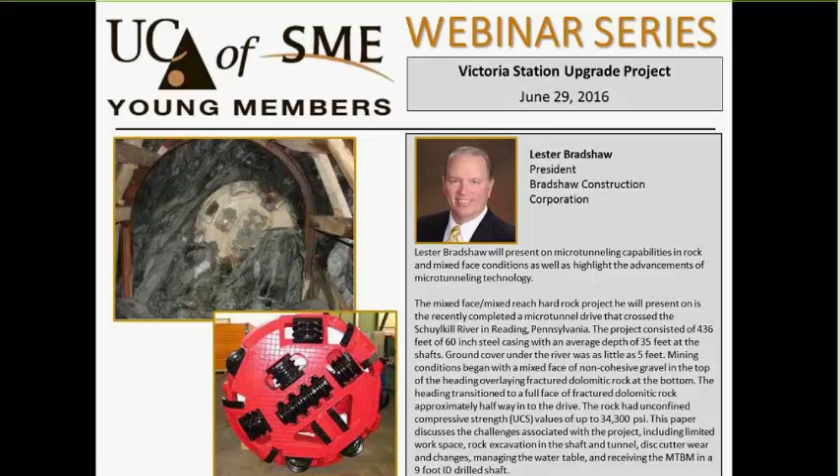I was asked to do this webinar just a few weeks ago, and I wanted to talk about microtunneling in rock. It's something that's not done all that often. For those not familiar, microtunneling is pipe jacking, using remote-controlled equipment much like ROVs searching under the water for things like the Titanic. We control these machines remotely from the surface, and they're very sophisticated with slurry systems for holding face stability and transporting the soils, and very efficient.

Today I want to share facts and things we've learned from a contractor's perspective on microtunneling in rock, whether sedimentary, igneous, or metamorphic. Then I'll go through a case study of an actual job, to get a sense of what it's like to be a contractor.

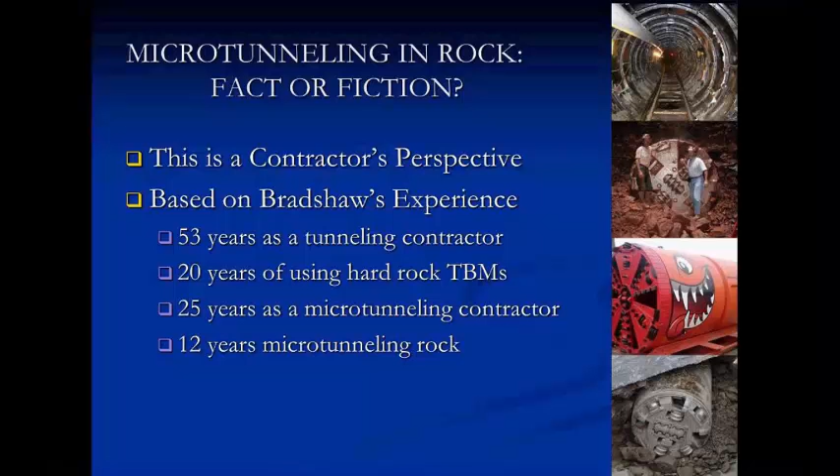Many in the industry, and bluntly among the engineering community even to this date, are unfamiliar with the ability of microtunneling to cut rock. There have been, however, significant developments in that industry over the last 20 years.

When it was first attempted in rock, there was very little success, primarily because many of the original microtunneling firms were not tunneling firms. They hadn't hand mined or used TBMs before and didn't understand the limitations.

There was also one major development in the industry by Herrenknecht, which was face access, the ability to go through the machine and change the cutting tools as they wear out when cutting rock. That was a critical aspect.

When that became available is when Bradshaw decided it was time to try cutting hard rock. We purchased the equipment in 2004 and did 6,000 feet of 60-inch OD concrete polycrete pipe in Baltimore City, in mixed face, mixed reach, and solid rock, which so happened to go all the way up to 43,000 PSI.

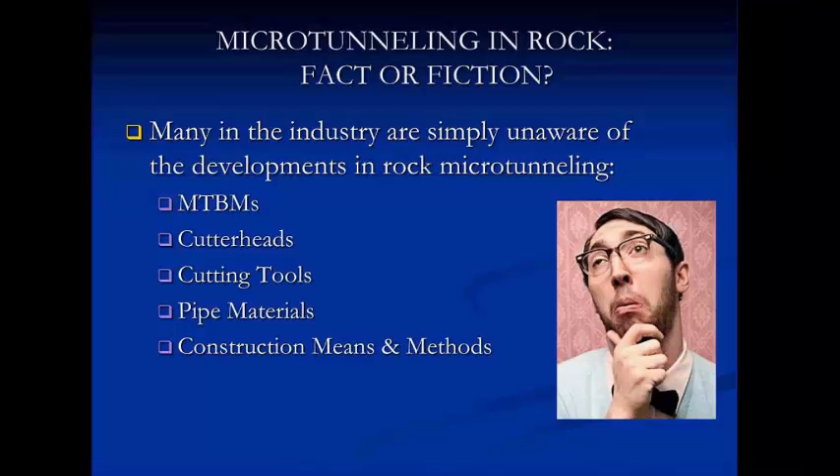Prior to 2004 or so, there had been quite a bit of sedimentary rock microtunneling. It's soft, behaves like dense soil, with a significant amount of it in the Midwest United States. In fact, some production records were set, I believe, pipe jacking through soft shales, clay stones, etc. We've done several of those projects, and it's quite different when you can push 50 to 120 feet of steel casing through the ground in soft rock, as opposed to sometimes in crystalline rock spending 12 hours to cut 8 to 12 feet.

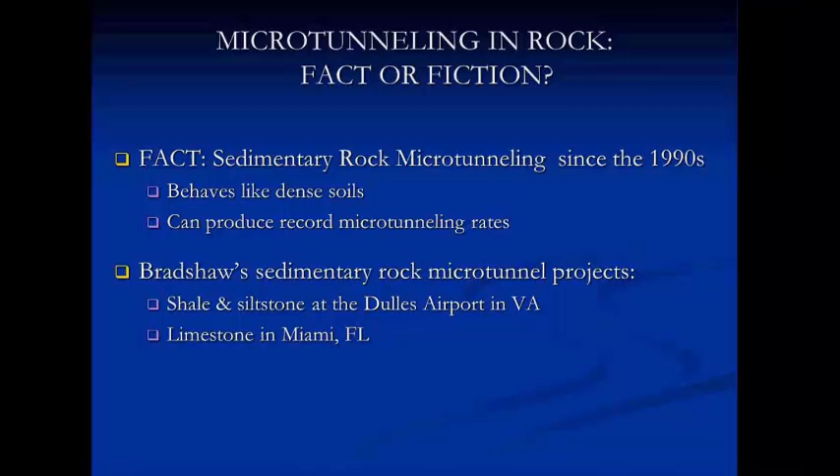What do we mean by hard rock? It's igneous and metamorphic rock formations - crystalline in nature, abrasive, and in the worst case, also massive with very little fracturing. Often people look just at unconfined compressive strength and think that tells you a lot, but highly fractured rock can have very high UCS, 30,000 to 40,000 psi, yet if it's got a lot of fractures, the disc cutter technique of mining is quite effective. As opposed to that, we've seen massive rock as low as 12,000, 15,000, even 10,000 psi UCS be exceptionally difficult to cut through.

Early attempts, as I mentioned, were made in the 90s, and they were extremely limited in success. Most completely failed. We're talking about going 15 to 20 feet and having to extract or backpull the machine to even attempt to try again. The cutters wore too fast, and you couldn't change them except by pulling the machine out or digging a rescue shaft.

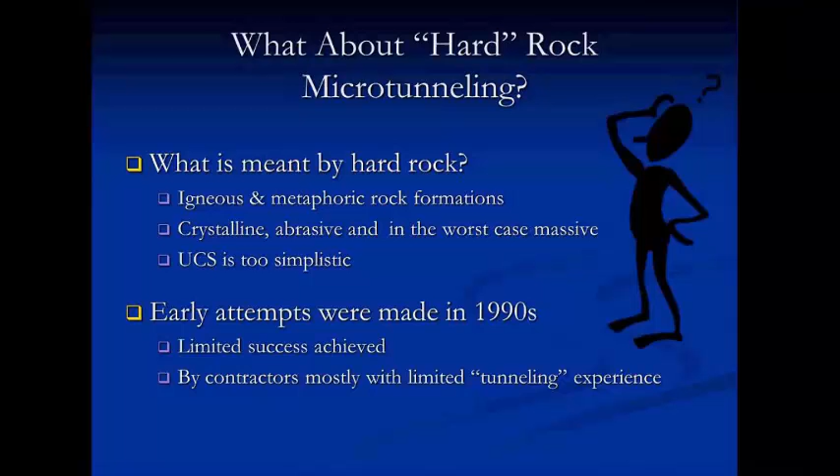As I mentioned, face access was introduced, but only down to 59.25 inch TBMs. The primary reason is that in a 59.25 inch OD TBM, there's only an 18-inch port - looks like a porthole, like a torpedo tube door - right up through the center of the machine to the back, and the cutting chamber itself is relatively small. You truly have to micro through that hole to change the cutters, but we do it.

The new HK T-Series TBMs that came out back then were considerably heavier and had a lot more torque to cut rock with. We studied closely all the early projects we could and compared them to our main beam TBM machines, of which we have used one at 83 inch and a little bit larger.

The other thing to keep in mind is if you get below 59.25 inches, you don't have face access, and therefore the length of a microtunnel is highly dependent on how long the cutting tools will last at the face, particularly the perimeter gauge cutters. You might be able to go 200 feet, maybe even 500 feet in a soft shale, but in a hard crystalline rock, you may not get 25 to 50 feet before you run out of gauge.

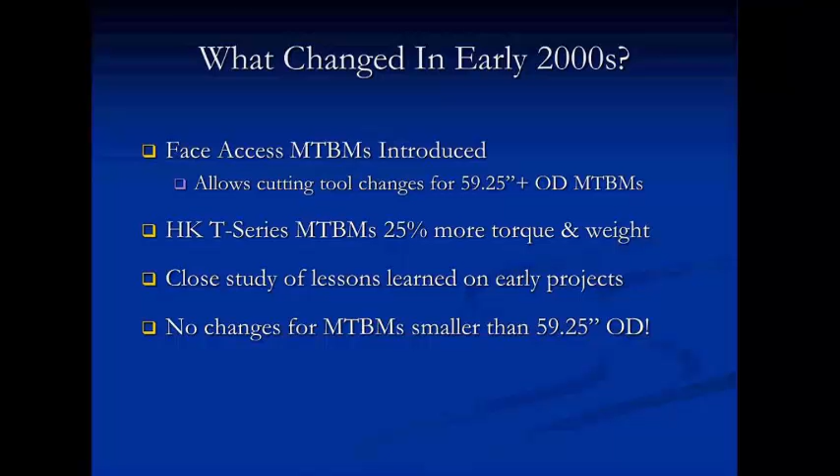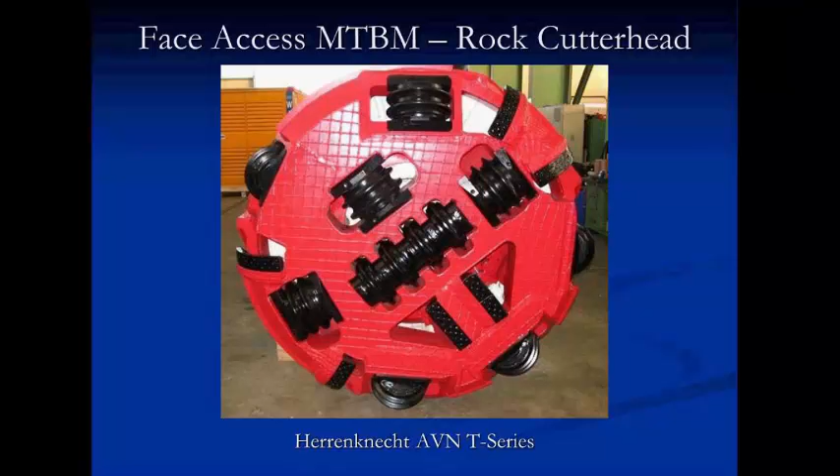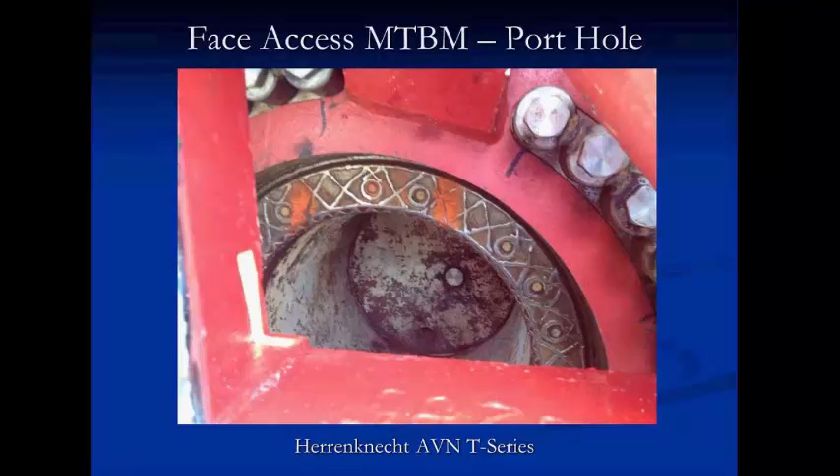These cutters can be loaded from the front of the machine, which makes it easy for servicing when they're above ground. You load them from the back when you're below ground, through the cutting wheel. You can see that porthole in there, and that's what you crawl through to make the cutter change.

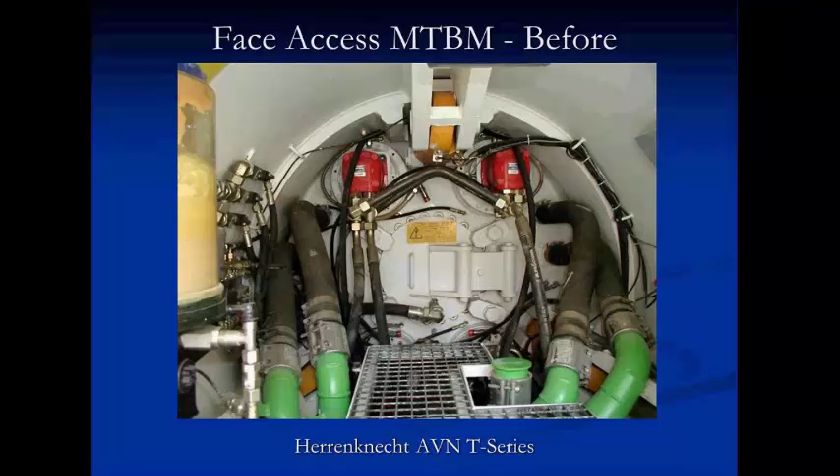From inside the machine, when they're in the shop, they're nice and clean. You can see that door up there, and that door is much like a torpedo tube door. You don't bolt it, you disconnect it from the slurry line, or in this case a bit line, and crawl through. After you've done a drive, or partially through the drive, this is what it looks like after a while of crawling through, because in the back of that cutting wheel are cuttings and slurry sometimes. You have to be able to pump them out and crawl up in there.

In this instance, you're looking at triple kerf cutters. I think this happens to be a mixed ground cutting wheel we were using.

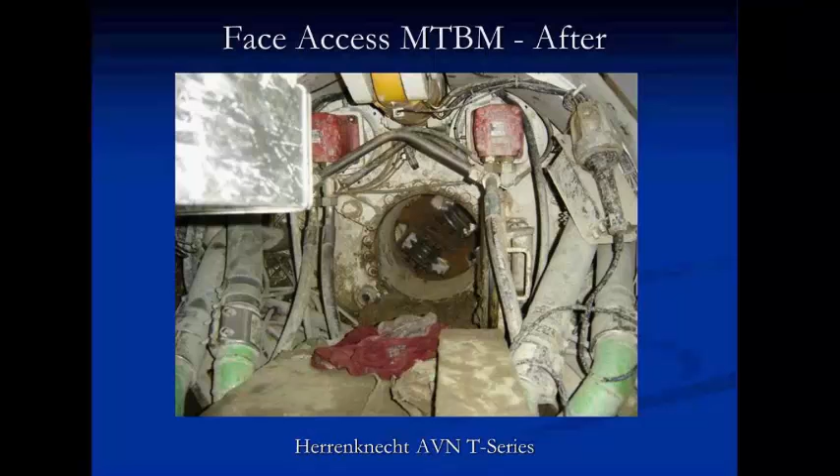Fundamentals of physics when it comes to rock cutting: large, up to 72 inches, the maximum diameter cutter you're going to get is 11 inches. That's the red double kerf cutter on your left in this picture.

We recently purchased a Robbins double shielded machine where you can front load the cutters, and we've got them up to 14 inches in diameter. On your typical TBM, I believe at Robbins they have one that's 88 inches, but typically from 96 inches and above, they will front load 17-inch cutters.

The difference between back load and front load is the front loaders have much more bearing surface on the front of the machine, whereas with the back loaders you have to cut out the actual cutting wheel to fit the disc cutter up in, and try to get optimal spacing, which is about 75 millimeters, between kerfs, and fit enough of them across the face that they don't get in each other's way and allow room for ports for the material, the cuttings, to come through the head. It becomes a very complicated and difficult problem the smaller you get.

The other key to this is look at the thrust capacity. An 11-inch cutter has 17,000 pounds of disc cutter capacity, and that only comes if you create what's called a monoblock cutter. The cutter on the left there is around the outside of a bearing race, whereas the other two are what are called ring and hub. A ring is a cutter that is put onto the hub. That cutting ring is replaceable, whereas the hub and bearings can keep going.

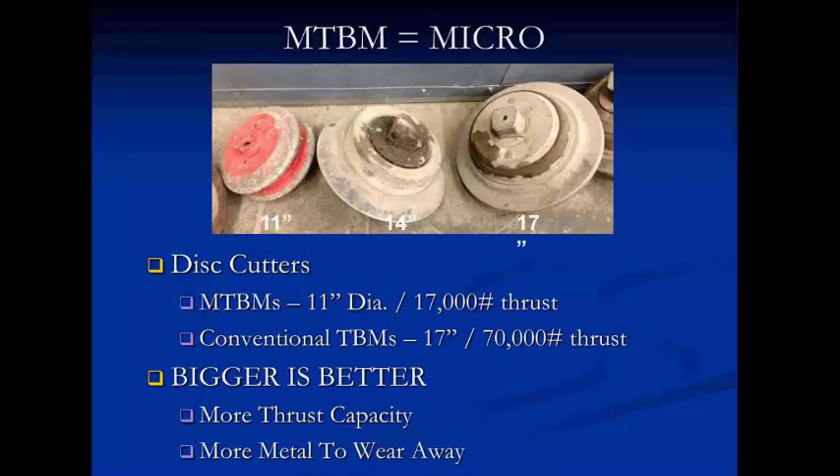Microtunneling, though, why do it? And why not just have an all rock tunnel and use a conventional main beam machine? Well, we do a lot of water and sewer work, particularly shallow gravity sewer work.

What you see there is you don't see solid rock. You see mixed face, mixed reach conditions, highly weathered to competent rock. Main beam tunnel bores, even double shielded, Robbins machines, do not do well in mixed face, mixed reach conditions. We just finished 3,000 feet and multiple drives in Baltimore City.

Every time we hit highly decomposed rock, the machine clogged up and we got terrible production. In those areas, the microtunneling machine would have gone quite well. The reason we used the Robbins was because we could put 14-inch cutters on the front, and the bulk of the job was solid, hard rock up in the 30,000 range.

The smaller the diameter, many of you are engineers, the smaller the diameter, the stronger the rock is, because we have a lower radius on our arch, and you have less flake drop out of the matrix. On jobs where our 60-inch rock machine will go through, there will be no blocky fallouts of the crown.

Same job where we attempted to use our 83-inch main beam Jarva machine, and the blocks just slid right out of the shoulders. The dip on the rock was in the 70 to 80 degree range. It came in, damaged the cutting wheel, and prevented us forward operation. So the smaller can be better.

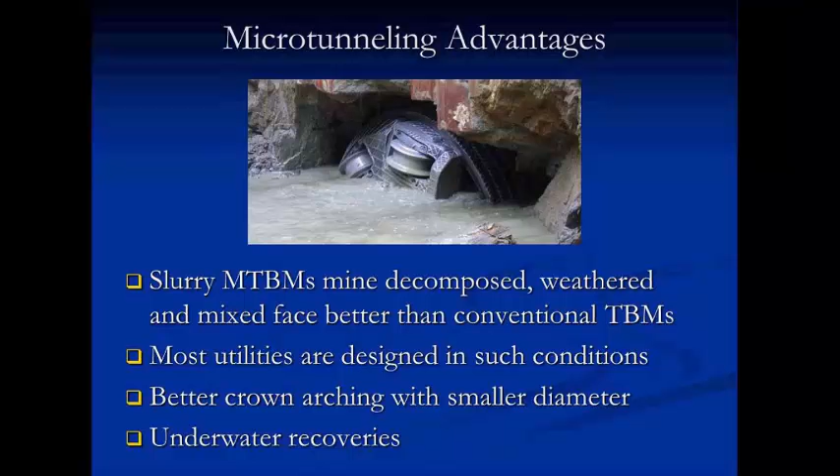The key to rock microtunneling: understand the geology, and then understand the limitations of the equipment, the pipe jacking materials, and then the means and methods themselves.

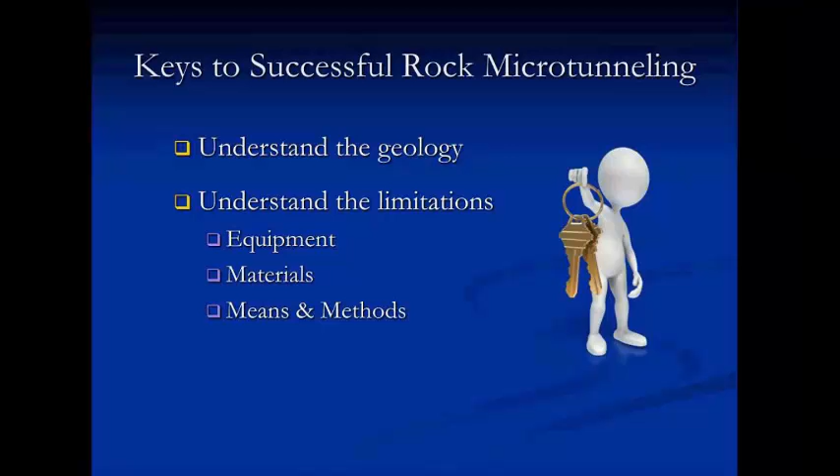We want to know the type of rock by drive. Many times, like for example the recent Baltimore City job, there were 5 drives, and each one was different. We want to know where the rock is within the drive.

Therefore, testing of the rock to find the zones and the ridges, whether there's any peaks and valleys or is it solid. At least here on the East, it varies tremendously. More in the Midwest, the material is sedimentary and it's laying relatively flat.

But you're going to get areas, we looked at in Denver, the rock was up on a 40 to 50 degree angle, and therefore you were mining through multiple layers, multiple zones, and knowing where those zones are can be critical.

We were not the low bidder, but it's going to be quite challenging to any conventional TBM because you go from 500 PSI shale to 25,000 PSI sandstone, and those behave incredibly different on the rock cutting wheel.

The other area we look closely at is the orientation and spacing of any rock fractures. We want to know, all you engineers out there, whether when you test it, it's a structural or non-structural failure. You'd be surprised how many testing labs don't note that fact. And if it's a structural failure, the UCS values are almost worthless.

We also look at abrasivity. Very important with microtunneling because our cutting tools are so small that they wear away quickly.

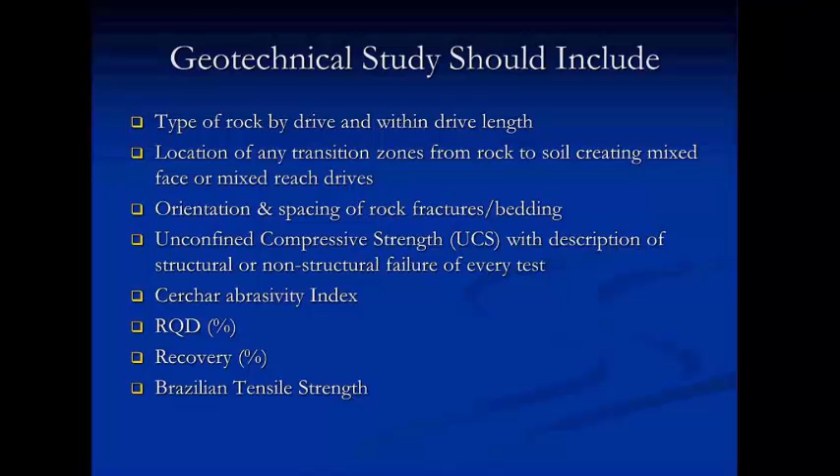We also look at things from point load tests, punch penetration. We have had, sadly you learn from experience, thin section petrographic analysis can be critical because we have run across several situations here on the East Coast with a condition called rock suturing, mineral suturing.

Where the grains of the rock, when you look at it under a microscope, are particularly long and chemically bonded together rather tightly. What does that do? What are the behavior issues?

The behavior of the rock then becomes much less brittle, which normally fractures quickly and easily with a disc cutter pressuring it. It becomes more ductile and tends to bend rather than break. The result is disc cutters tend to sink, they wear faster, and you make a lot of powder. And when you're making powder, that means the energy it takes to cut is much higher, because you're turning the rock into smaller pieces.

And we've tried to do as much historical research as we can when we look at these tunnels to see if there's any areas in there. Our particular experience has been with amphibolite or diabase, and those two particular types of rock are exceptionally ductile in their behavior, and it can be incredibly hard.

A couple recent projects: we did one between Baltimore and Washington, D.C., where the amphibolite peaked out at 55,000 psi UCS with Cerchar in the 4s, and we chose to drill and blast that job. Given the size of the diameter of the tunnel, there was no way we thought we'd ever cut it with small cutters.

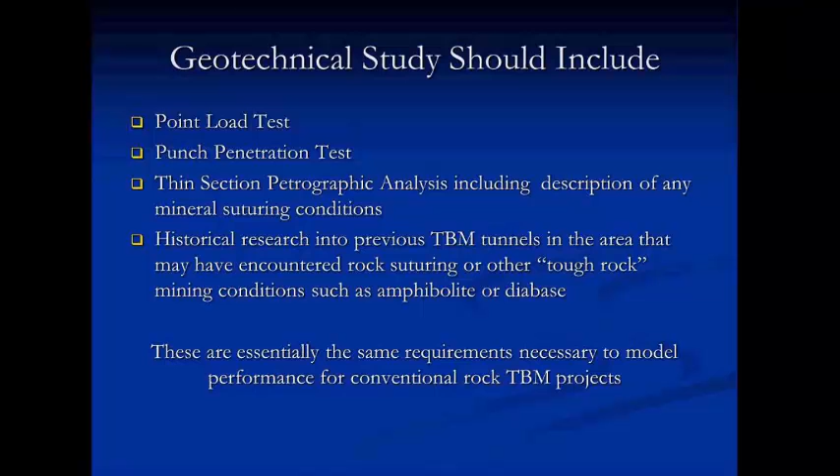So we can push on the rock much, much harder, and therefore its penetration rate is more than double what a microtunneling machine is. As important, or more important, microtunneling TBMs only turn at 2.5 to 5 RPM, whereas the Robbins TBM turns at between 14 and 15, up to 15 RPM. We figure more like 10 to 11 under load.

But you can see, by the simple formula that you take your instantaneous penetration rate times the number of RPMs times the number of hours in a shift times the percentage of the time the cutting wheel is turning, you come up with your day's production. It's a scalar multiple of RPM. So there alone, a conventional TBM is 2 to 3 times more productive.

For gage cutters—these are the cutters out at the perimeter of the cutting wheel. They're almost perpendicular, the ones far out, to the direction of the mining, and they are highly sensitive to abrasive rock. They also cut the hole that allows the TBM to go through.

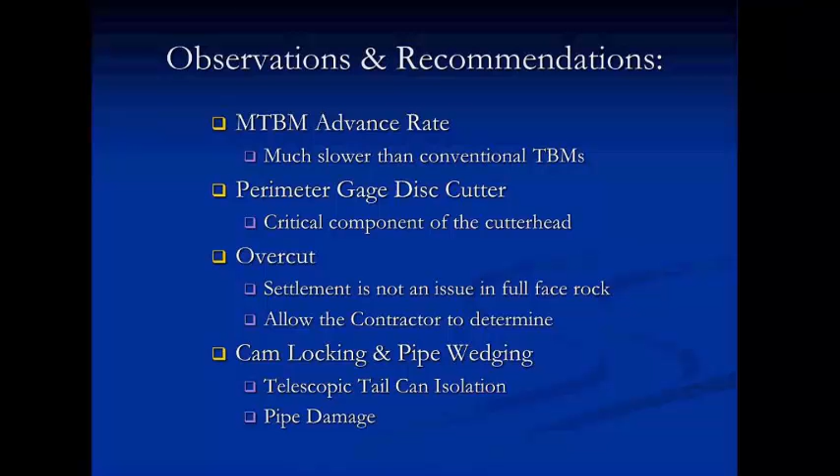In some instances, if the pipe being pushed is irregular, meaning it's not round and therefore sitting off center, it can literally scrape those cuttings up, pile them up, and the entire pipe string get wedged against the roof of the tunnel and break the carrier pipe, and/or freeze it in place from jacking pressures. So proper choice of the carrier pipe is critical for pipe jacking in rock when you think about it from the tensile strength point of view.

So today, rock microtunneling is absolutely a fact. We do it all in sedimentary rock, but now it is in crystalline rock as well. Face access is the real key that saves that—there's not a drive we have today that we don't go out into the face for machine cutters.

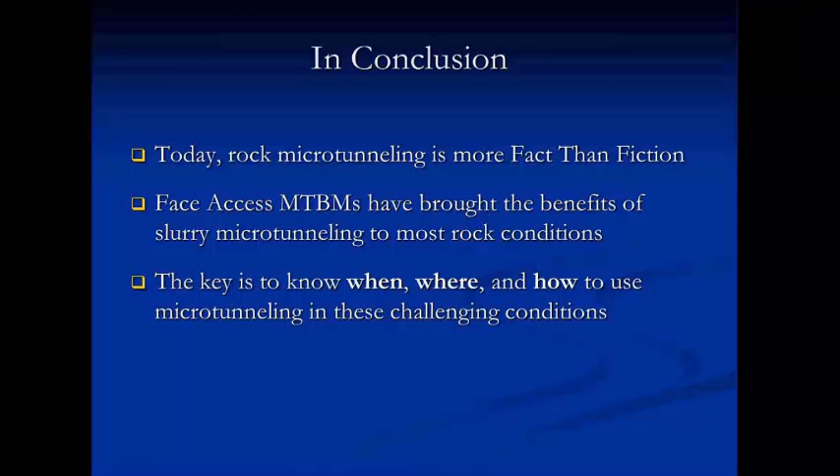And the real key to it all is to know where, when, and how to use microtunneling in these types of conditions. Now I want to give you a little example of what it's really like to do this for a living. We did a project in Reading, Pennsylvania, and this is a site view of the shaft in the banks of the Schuylkill River, just on the south side of Reading, Pennsylvania.

I'll give you the typical presentation—this presentation is also on our website. If you'd like to read, there's a paper I wrote about it that gives you even greater detail than I'm possibly going to be able to cover today. It was a 42-inch force main project for the city of Reading. We worked as a subcontractor to a local contractor, Pack Construction.

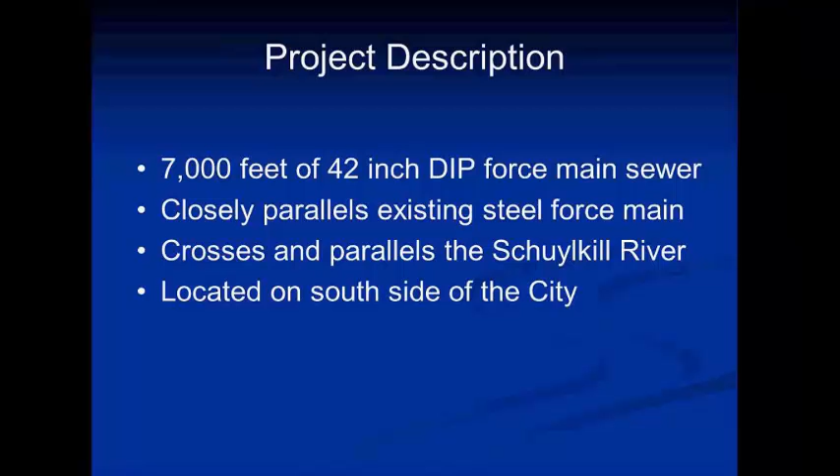Pack was building 7,000 feet of 42-inch DIP force main. It paralleled an existing steel force main that was on the verge of, or had some problems with, failing. It crossed and paralleled the Schuylkill River and is located on the south side of the city. Here's a good picture of what you are seeing—the microtunnel is up at the river crossing on the north end of the project. The rest of it ran right down the river bottom, along the edge of the river all the way, paralleling the existing force main.

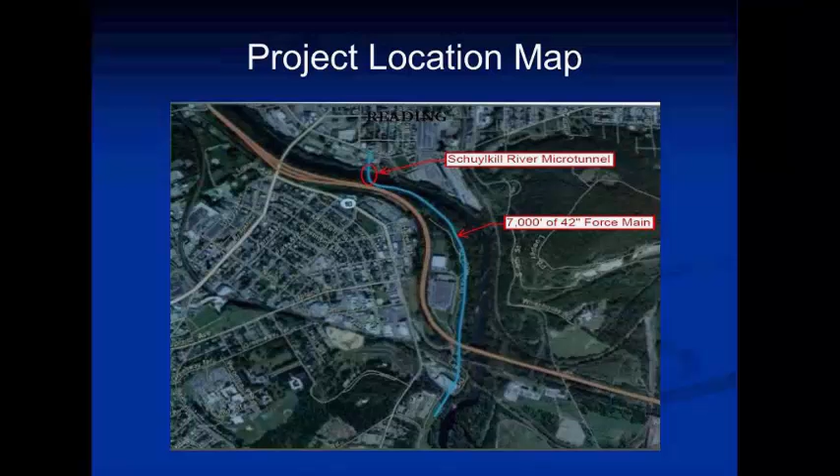It was a project to create redundancy, to allow maintenance. They couldn't shut down the existing force main to reline or repair the steel. Without that line, the city had a desperate problem for sewage treatment. They would be able to split the flows in the future and create less wear and tear on both lines, and they needed future capacity. So that's what the owner's goals were here.

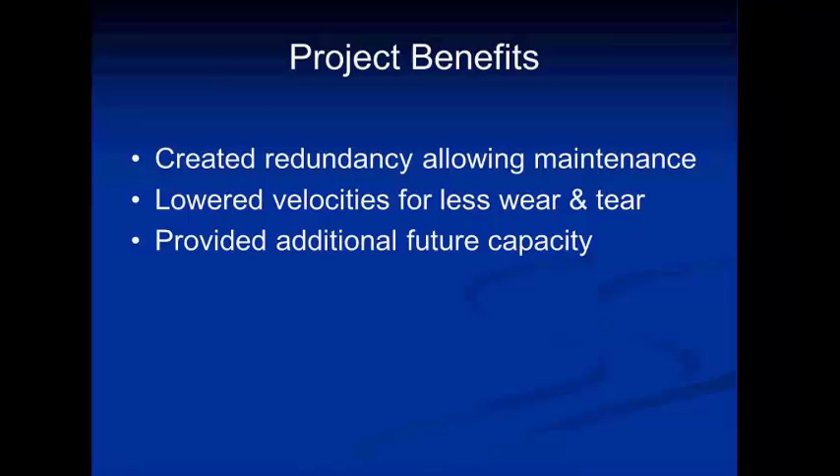But it required crossing the Schuylkill River from the pump station. The pump station had contaminated groundwater. We had to work alongside that deteriorating existing steel force main, and we had to work in a flood zone. The receiving shaft flooded regularly, and the mining or launch shaft was subject to flooding as well. We had extremely restricted access because we weren't allowed to interrupt that pump station's operations, and we had partial rock at both shafts, which can make it difficult to install when you have sedimentary material over rock.

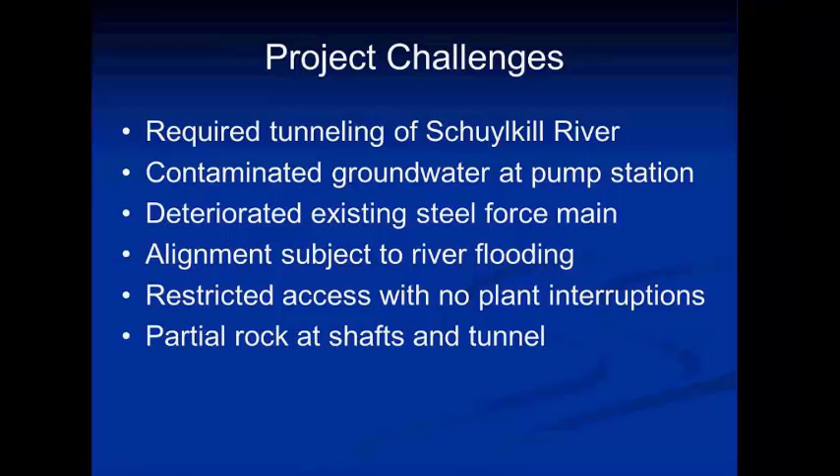So we basically had mixed reach shafts. Not only was it mixed reach tunneling, it's mixed reach shaft. What we mean by that is soft ground over rock. That requires different mining techniques, or you may only use one technique, but it can be severely impacted because you're trying to overcome the worst condition, and sometimes that doesn't make it easy either. But it does get the job done, and that's what you look for as a solution as a contractor here.

Microtunneling—I'll give credit to the owner and the engineer. They knew what they didn't know, so they pre-qualified microtunneling contractors and tried to learn about what it is they were looking for. Further, they required that the general contractor, none of which were microtunnelers, write in who was going to be their sub. They did not want bid shopping, and they did not want any questions after the fact, having gone through the pre-qualification process. It was an independent pre-qualification well in advance of the bid itself.

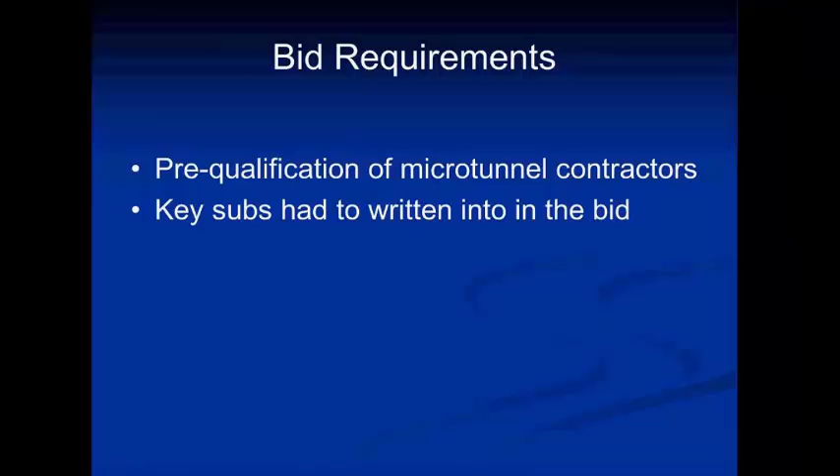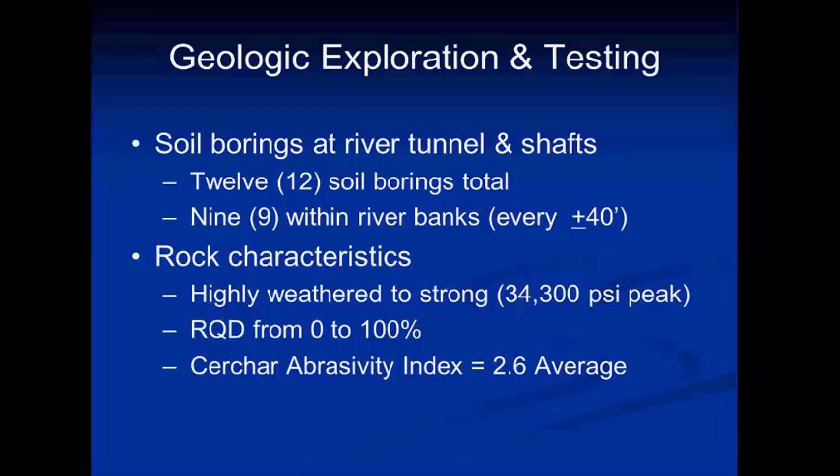We expected a jacking shaft, just like alluvial soils all the way down with rock below invert. For the tunnel itself, we expected 220 feet of alluvial soils, 40 feet of mixed face transition rock, and 176 feet of hard rock—that's 436 feet, not 460. That's based on the geologic report, which was extensive.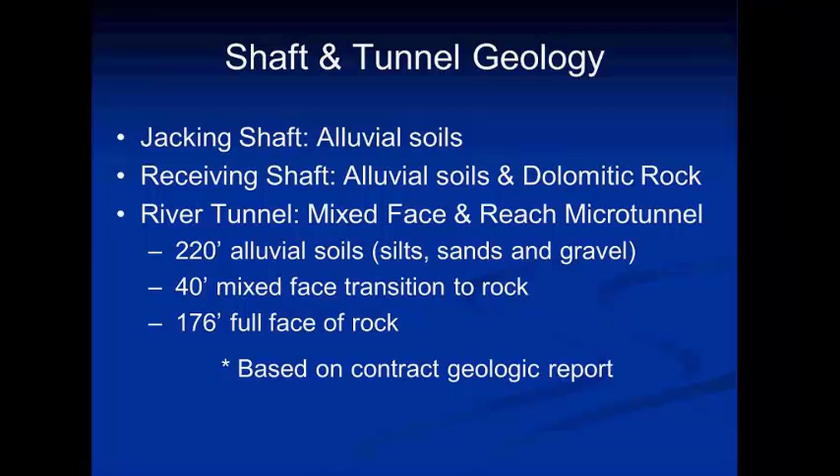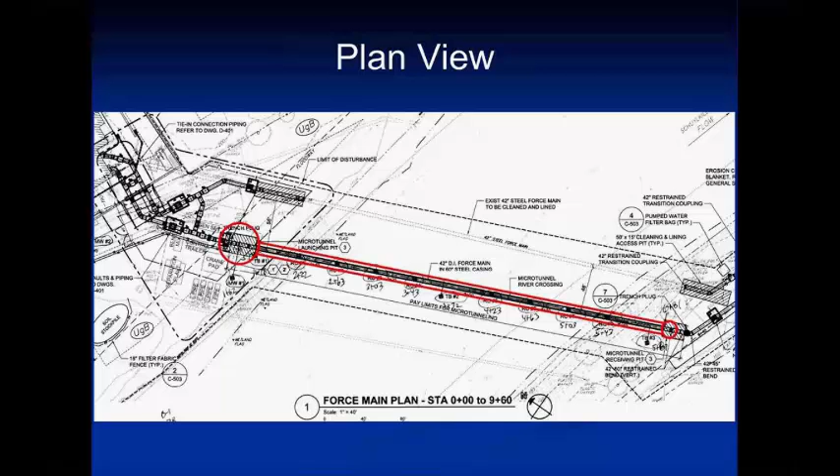Here's just a plan view. We tunneled from the west side, actually from the north side—this is turned a little—to the south side of the Schuylkill River from the plant, which is up on your upper left. And here is the anticipated rock profile. We felt there was more than enough information that you could quite clearly define this. We were going to go from a secant-piled jacking pit on the left to a drilled receiving shaft on the right. You can see where the rock profile was plugged in, based on 12 bores to determine where this was at.

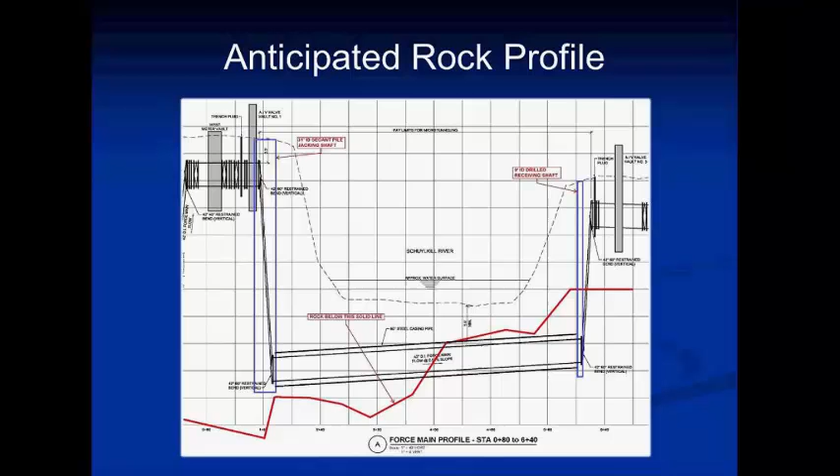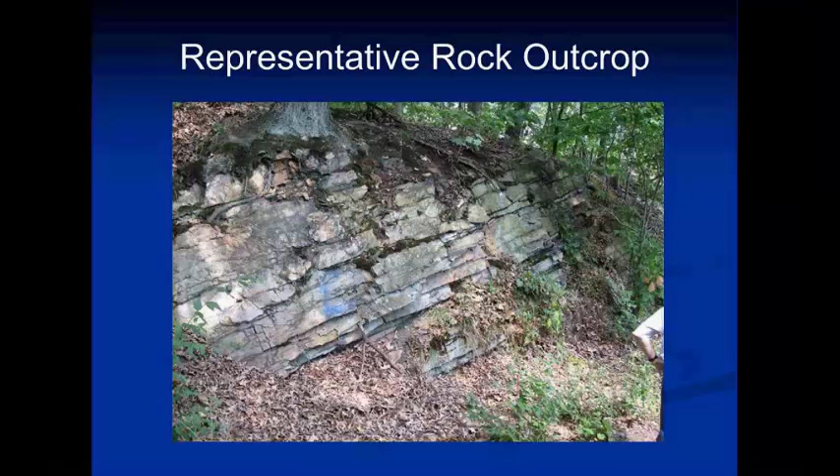I will go into a little bit of the weeds of the contract. They made the contractor responsible for selecting the type of TBM and the cutting wheel. In this instance, we of course had to choose a hard rock disc cutting wheel because we had to—within the alignment, we had to go through up to 34,000 psi rock. We didn't have a choice. That is not the cutting wheel you want on alluvial soils.

The openings in the cutting wheel are relatively small. The material comes in slowly. It impacts production, and it's not really appropriate, but we didn't have any choice. We could not put a shaft in the middle of the river and then only mine the hard rock one way and the soft ground the other.

We were responsible for retrieving the MTBM if it got stuck or failed to finish the tunnel. Now, that would have been exceptionally difficult in this river. Again, we had to choose a method that almost guaranteed that no matter what happened, we could get through the soils. We had to be able to progress past or through any objects or obstructions—which is a little curious, because the next statement was that we were only responsible for mining obstructions up to one-third of the ID of the pipe and up to 30,000 psi.

We knew that the rock was up to 34.3, so there were some inconsistencies in the specification. They specified that our line and grade, although this was a force main, should be plus or minus 2 inches of the casing. This was a 2-pass tunnel. We were jacking a 60-inch steel casing, and then we would thread, I believe, a 42-inch ductile iron pipe inside of that. Well, the relevance on the tolerance is where do you want your pipe?

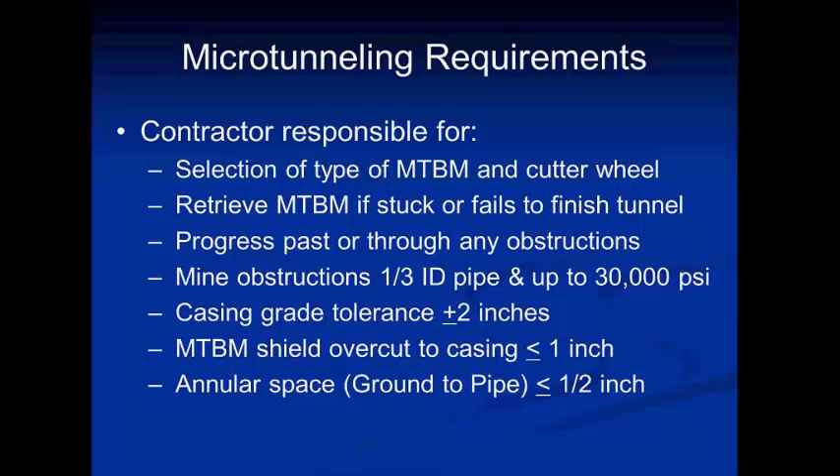Inconsistencies, I just mentioned it. The rock was actually harder than they told us the limits were. The tolerances were for the casing, not the carrier pipe. The annular space was less than the shield pipe overcut, etc.

In rock, I'll repeat myself, we have to have overcut to steer the TBM. That's number one. We also have to be able to, in rock, account for cutter tool wear, particularly on gauge cutters. Even though this was a low surcharge project, you still have to worry that gauge cutters will wear, and as a result you don't want to wedge the machine. So you're going to shim your gauge out, take a larger bite, and worry about the extra space around the machine.

Rock cuttings can pick the carrier pipe up and push it against the roof. In this instance, we weren't particularly worried about it because at 460 feet, we thought we would have good luck overcoming any additional resistance that developed as a result of that.

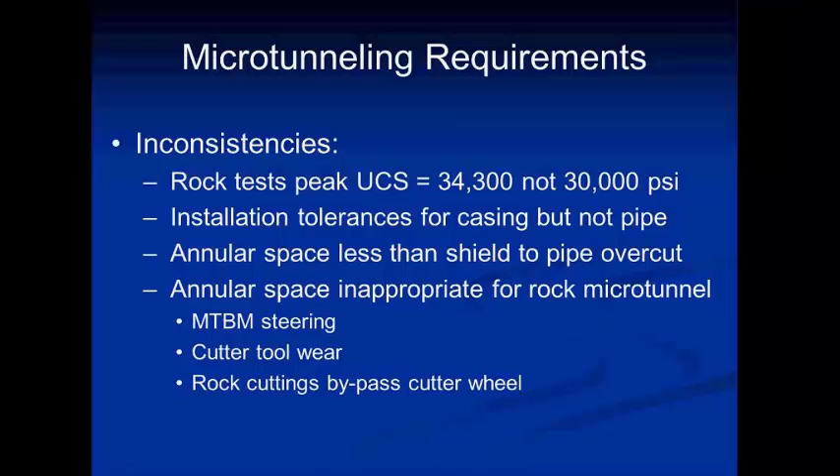There were other requirements, like at the jacking shaft. We were highly limited in our ability to affect the plant operations. We had to coordinate with the plant to get in and out, and we developed a good working relationship. They were supportive because they knew they needed the extra line. So although the specifications were rather extensive on this, in fact the working relationships were quite good.

We had to work in contaminated ground, which means they also limited the infiltration to that jacking shaft to only 50 gallons per minute. And when you're right against the river, that's a significant challenge. Weathered rock was within 5 feet of the invert. So how do you seal your shaft off so that you can excavate it? We intended to excavate it subaqueously and then pour a tremie slab in the bottom to seal off the water.

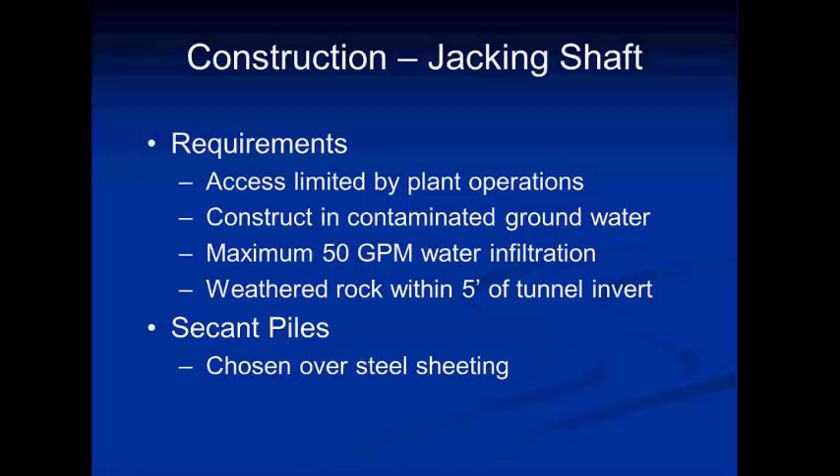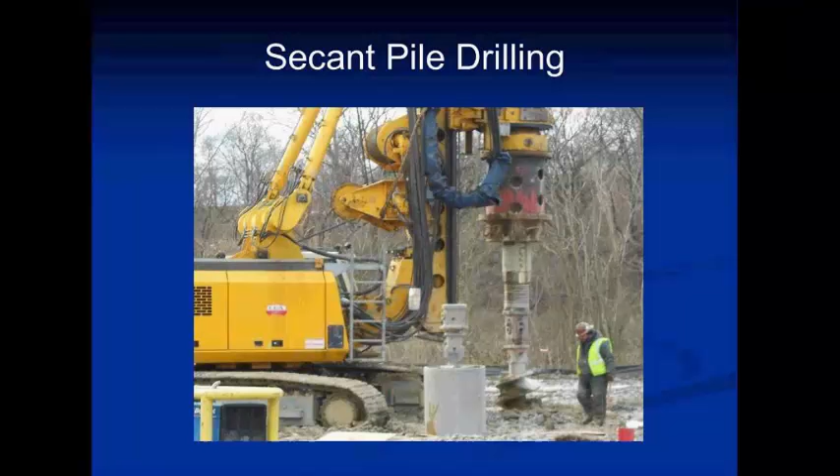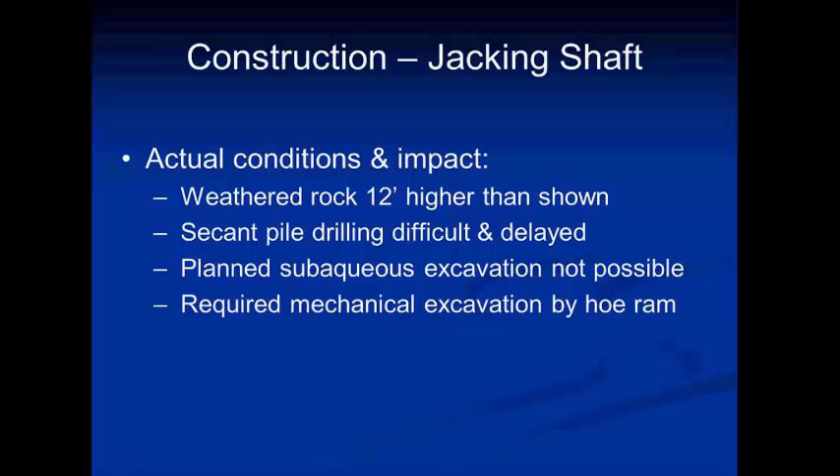I can drill the center of them out. But actual conditions: when our secant pile contractor's driller got out there, he hit weathered rock 12 feet higher than shown on the plans. It more than doubled the time it took to drill the secant piles out and made subaqueous excavation impossible. In fact, you'll see here, this is what the bottom 10 or 12 feet looked like.

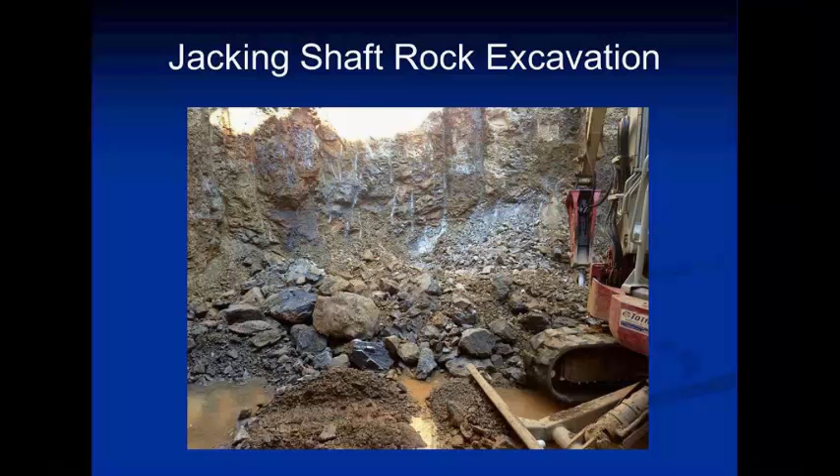We had to hoe ram down. We were not allowed to blast, and never anticipated blasting with it. But we did get it down eventually, and we put in a reinforced slab to control any possible water pressure from seeping through the rock itself.

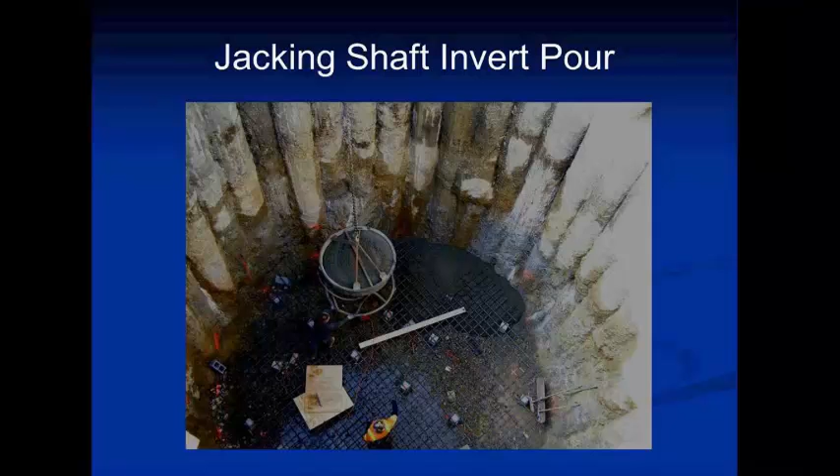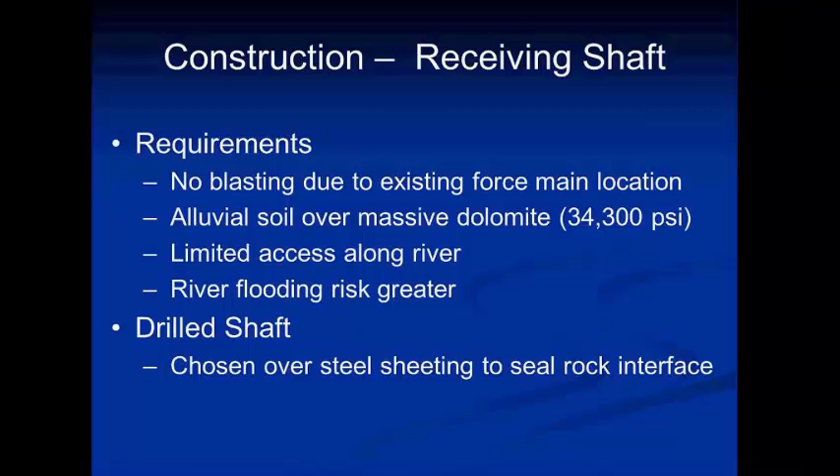The receiving shaft, again, was no-blast due to the existing force main. It was just soft alluvial soil, river deposits over top of massive dolomite. There was exceptionally limited access to get to it, and it was about 6 feet lower than the launch shaft, and therefore much more subject to flooding. What we chose to do was to drill that shaft in place, relatively small.

When we got over there, the bore log was exactly right. It was perfectly accurate for what it said it was. We had no surprises. Our contractor found, however, that the massive dolomite was a little tougher than expected to drill. It took a little extra long, but they drilled a nice 9-foot ID shaft.

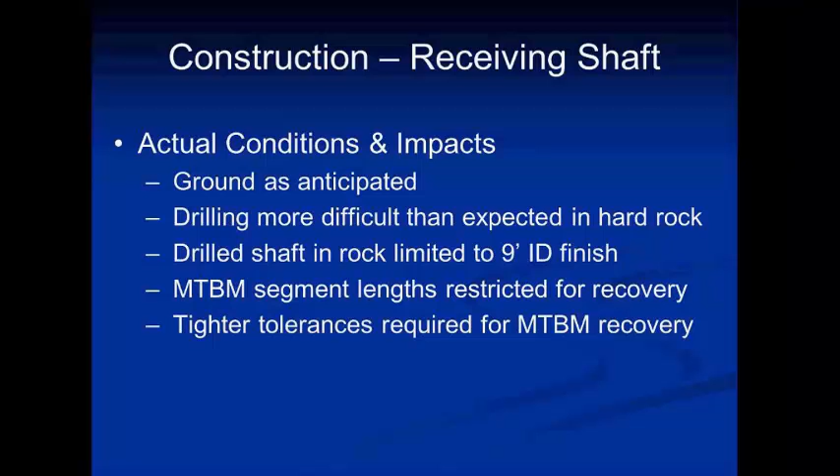We used a modified MTBM, one that can be taken apart in segments. It takes about an extra shift or more to disassemble as you recover the machine, but it's well worth it when you can drill a small shaft rather than hoe ram a much larger one. Drive tolerances are tighter than normal.

We had other issues where the tunnel had been raised. The original geotech report showed 10 feet of cover to the bottom of the river, but somewhere along the line the owner or engineer decided to raise the tunnel, minimizing shaft costs, I suppose. But we only had one diameter of cover shown at the bottom of the river.

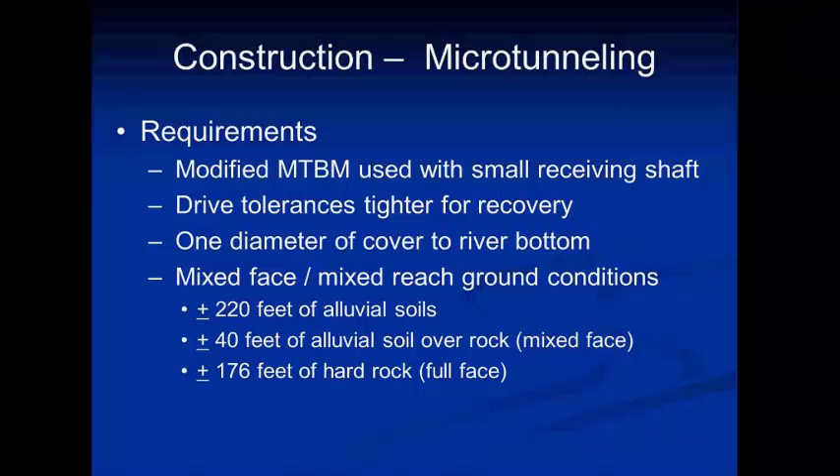I mentioned before, this was mixed face, mixed reach. What I mean by mixed face is you've got alluvial soil, say, over rock at the heading of the machine. Mixed reach is so much of one type of material, then so much of another.

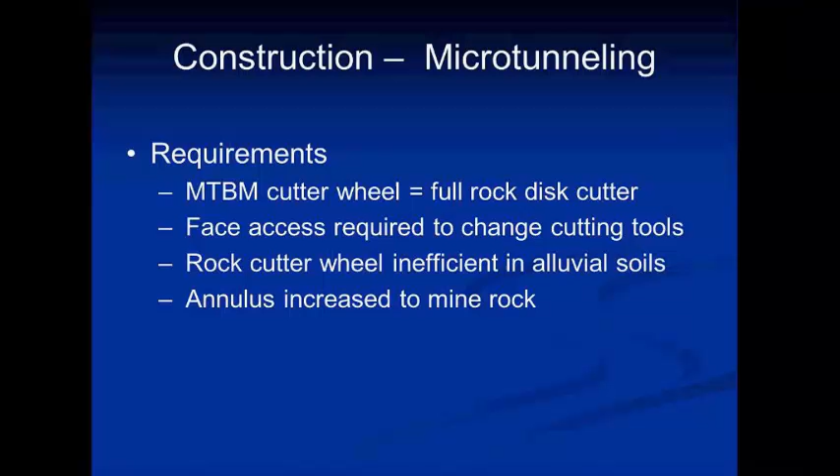We used a full disc cutter wheel, as I said, because we had to cut the rock, so we had to use that in the soft ground too. It did allow us face access to change the cutting tools. We did have to deal with the inefficiency in alluvial soils, and we increased the annulus space to mine the rock. This is the type of cutting wheel we used.

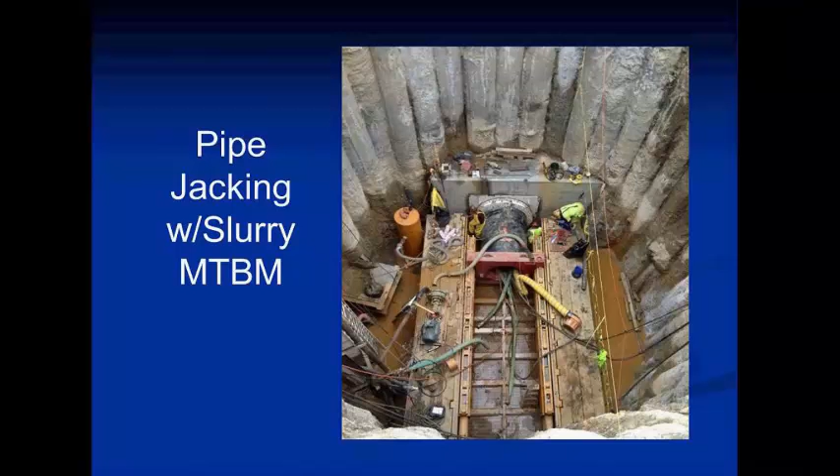Here's a picture of us actually mining. You can see the exit wall with the exit seal, a double gasketed exit seal because of the river's proximity. We are jacking a Permalok steel casing, which comes in 20-foot joints.

This is an indexing frame. It moves forward in about 1 meter strokes, then re-indexes and moves forward again, chasing itself across the shaft. Very efficient, and it's the shortest type of frame you can use, which minimizes the necessary shaft length. So what did we find?

I mentioned before, the rock was high up in the mining or launch shaft. We also found the rock different under the river. I think the key is we had 112 feet of highly weathered rock, which turned out to be mixed face, and mixed face rock tends to throw the TBM off line and grade easily. We have to mine slower when that happens, trying to cut and turn into the hard rock portions and hold the machine in place to cut a spot through that hard rock.

It can be done, but it's very difficult. Then we had 84 feet of alluvial material that surprisingly had what we call core stones in it, and those, like boulders or core stones, can jam the head. In the middle we hit pure river gravel, which can sometimes pour into a TBM cutter wheel and lock it up. We experienced a minor amount of that, but it was concerning, because if the head locks up like that, there's hardly any way to deal with it—you can't enter the head because of the water at this head.

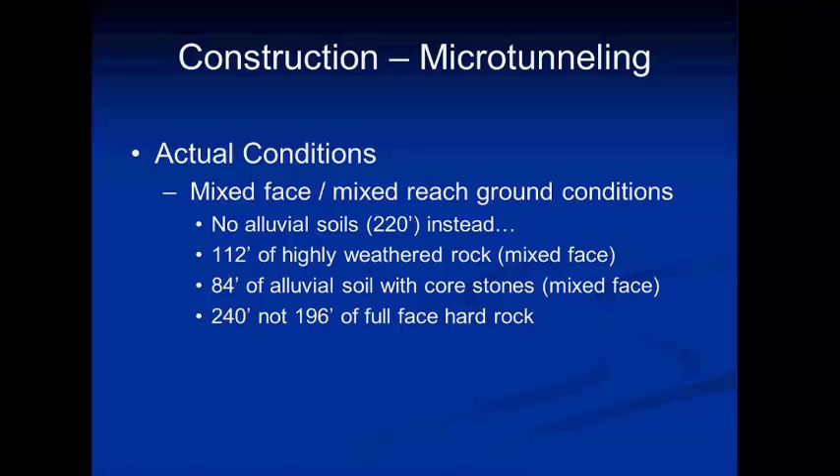At that size, going to compressed air wasn't an option, because we couldn't have held the compressed air under the river, so it was a very dicey situation when it happened. Then we hit almost 44 feet of more rock than we anticipated. So here's the real profile we believe existed out there, and you can see on the left side how much more rock and mixed ground there was than expected.

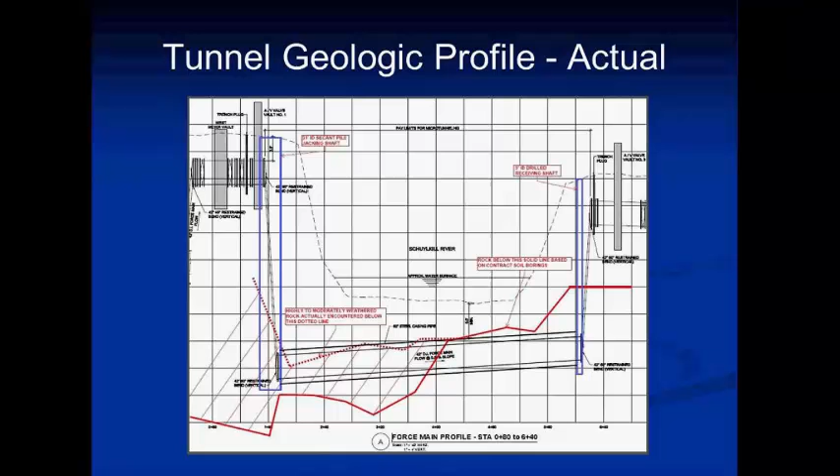I mentioned the river gravel clogged the slurry system, with shallow cover returning to the bottom of the river. Then that gravel poured into our bentonite, both the bentonite in our slurry and the bentonite lubrication we were pumping outside the casing pipe, which could escape to the river.

Our advance rates were lower than anticipated, in the 10 to 14 foot per shift range. Face intervention was required in the solid rock, and we had to do special annulus grouting just to access the face and prevent the river from coming in along the annulus of the casing.

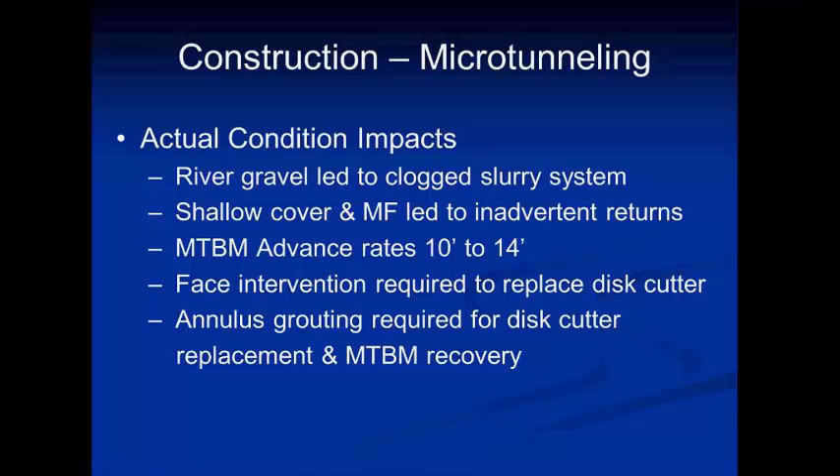We had a disc cutter bearing failure. This is not a gauge cutter, this is a face cutter. We've seen in microtunneling that because of the small openings in the cutting wheel, the cuttings tend to pile up in front of the machine and create what's called regrind, where you're regrinding the material. It packs in around the bearings and the cutters themselves, penetrating the bearing housing, and eventually the bearings lock up. When they lock up, the head just skids the disc cutter along and flat spots it.

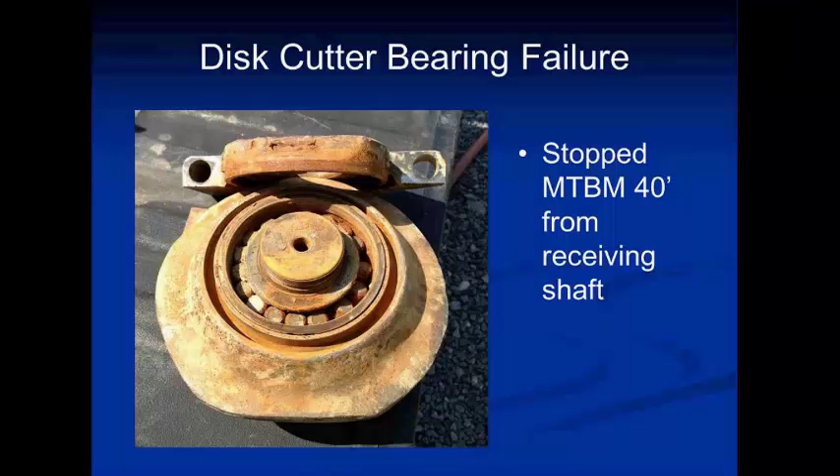We found this one before the cutting wheel locked up, I believe. If that wears away far enough and the actual face of the cutting wheel gets against the rock, the head will typically lock up at that point. But we were able to get through. We made it about 400 feet before we had to change cutters.

To get out there and change the cutter, we had to grout around the machine because the flow rate of water coming through the head was too great. So we grouted around the machine and were able to go out and change the cutter. Then we advanced the last 30 to 40 feet into the side of the shaft, grouted again to cut off the water, and recovered the machine in segments.

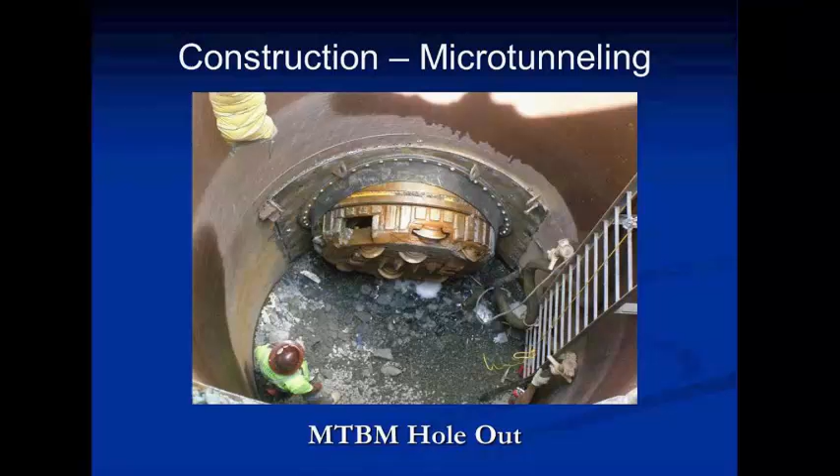So what did we learn? With holes every 40 feet, you still don't necessarily find the top of solid rock in areas with a lot of decomposed and weathered rock. We see this from Pennsylvania down through the Carolinas. It's a predominant factor here that finding top of rock is just not very easy, and therefore knowing even with extensive bore logs is hard to do.

It was our first secant pile shaft, and it was an excellent microtunneling launch shaft. It creates its own nicely stabilized exit eye, or entrance eye, and it's great for thrusting against. It's solid, it's watertight - not waterproof, but watertight.

We also know that drilled shafts are quite effective. This is about the fourth or fifth time we've done this in areas where access was limited, where conditions are easier to drill in a subaqueous shaft, tremieing a plug in the bottom and pumping it out. It just means your accuracy on your TBM must be much greater than normal if you do make a pass, because you wouldn't be able to recover the machine, and you have to customize your equipment.

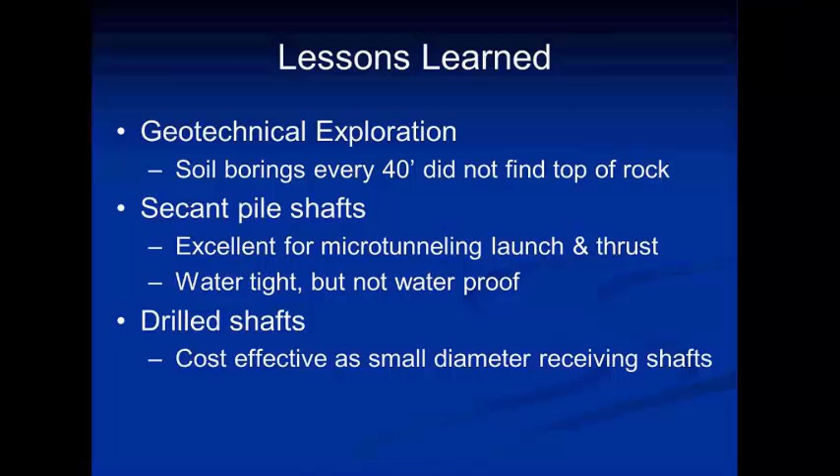Mixed face, mixed reach is challenging regardless of how much experience your operator has, as well as the contractor themselves. It typically means you're going to go a lot slower, and you're going to have more problems with settlement, with inadvertent returns to surface, because when you hit hard material with the machine and soft, fast raveling or flowing ground above, it will tend to come in.

Now, we use bentonite in our slurry in an attempt to cake. Best laid plans - many times this can happen rapidly, and you're playing catch up, and you've got to do the best you can. But when these conditions exist, it's best to at least discuss with local contractors, see what their experiences are and what they can do about it, and make recommendations when you're writing your spec.

You can achieve significant accuracy. That machine came out dead on line to within a quarter of an inch, even after 423 feet, after an intervention, and after 3 major transitions in soil type.

Bentonite slurry is not very effective. I mean, it's called for in many areas and many people believe in it throughout the country, but it's not always effective. We've tried it in a number of situations with mixed results. I do believe you have to try it, and sometimes it's an ideal thing, but in other cases, in true mixed face with rock, it has not proved to be a great help.

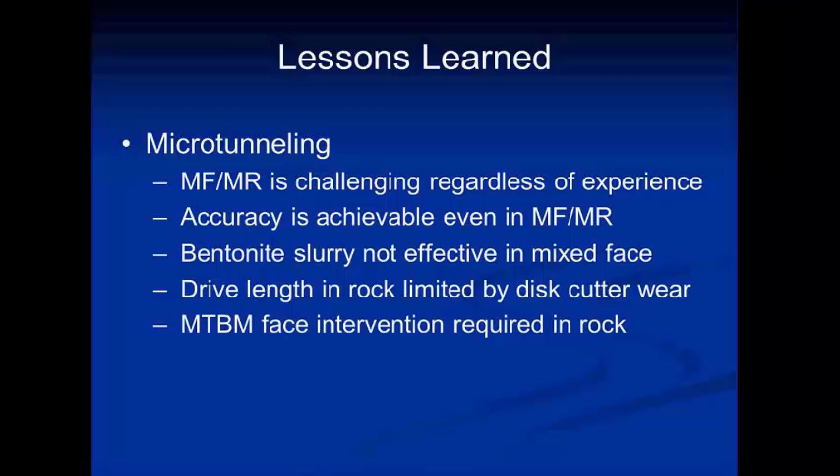Public relations: we had an excellent relation with the local newspaper, the Reading Eagle, and I like pushing this up because I think the guy did an outstanding job. Mr. Schaffer did this for the public to explain the cost of this work and how it actually worked. So we had him out and allowed him to look up into the tunnel, be in the control container, and see the whole operation.

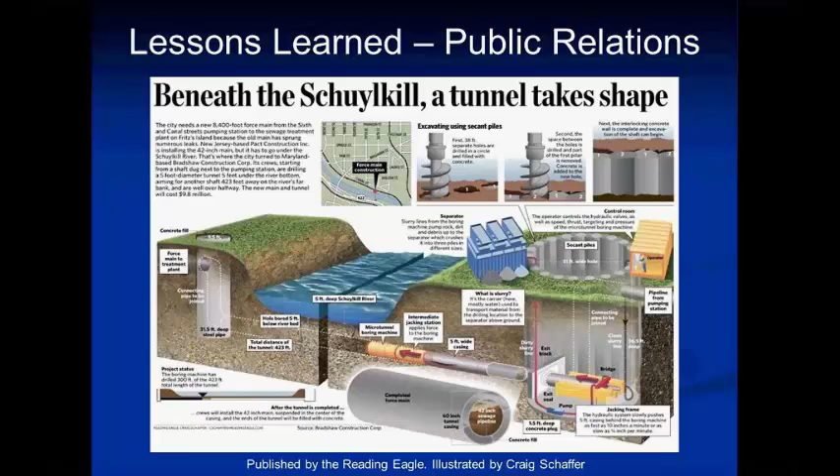A little career advice, if I was told to mention what I've learned in 40-some years: if you're going to be a tunnel contractor, you really have to study your geotechnical engineering and geology, believing that you know what's below the ground, and then select the right equipment, and finally be able to do a good estimate of what that equipment can do. This all comes back to how well you understand the geology.

If you want to be the boss, get an MBA. Don't kid yourself - between the legal and the business requirements in today's environment, you need all the education you can get if you want to run the show.

As far as tunnelers, you're going to learn this out in the field by doing. You're not going to learn this in a class anywhere - out there with work crews. We've had some engineers who go, 'well, why do I have to put on a hard hat and boots and get dirty?' And I said, well, because that's the way you're going to learn, because you can't find it out any other way.

I do want to mention that we've been hiring a number of what we think are really appropriately experienced mining engineers. A lot of these are people straight out of school, or who have spent time in mines. They're not afraid to go underground, they're not afraid to get dirty, and therefore they know how to go out and learn the business.

One thing about our business, and we don't want to kid anybody about it - most contractors will tell you there can be quite a bit of travel involved. You got to learn where the job is, and our jobs are relatively short. They vary from 1 month long to 2 years long typically, with a whole lot more that are 1 to 6 months than there are 2 years. So there's a lot of moving around, a lot of hotel staying. If you want to see the country, that's a good way to do it.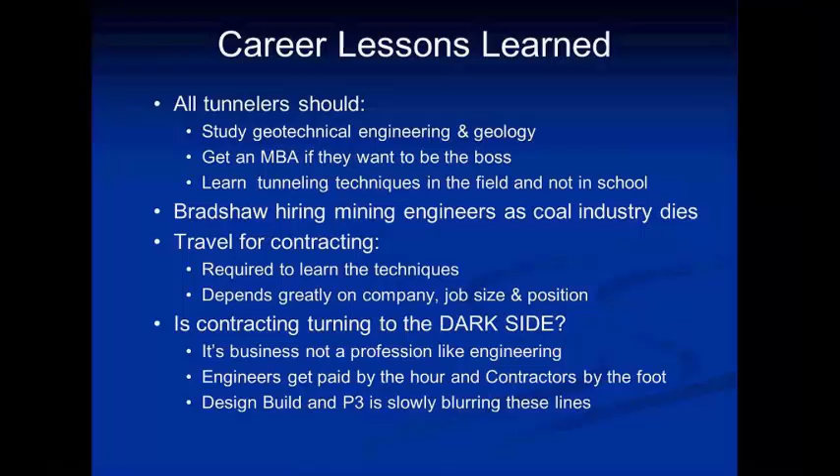To be blunt about it, when it comes to contracting, eat or be eaten. You got to be tough. You got to be willing to go out there and fight for what you want to do. And you got to keep in mind that you're pricing things. Like John Glenn, or one of the other famous Mercury astronauts, said he's sitting on top of a rocket built by the lowest bidder. You got to get the job, you got to be the low bidder. But you also got to build something that your client wants, that's good for the public, and that you can sleep at night when you're done, because most of them should last 50 to 100 years or longer.

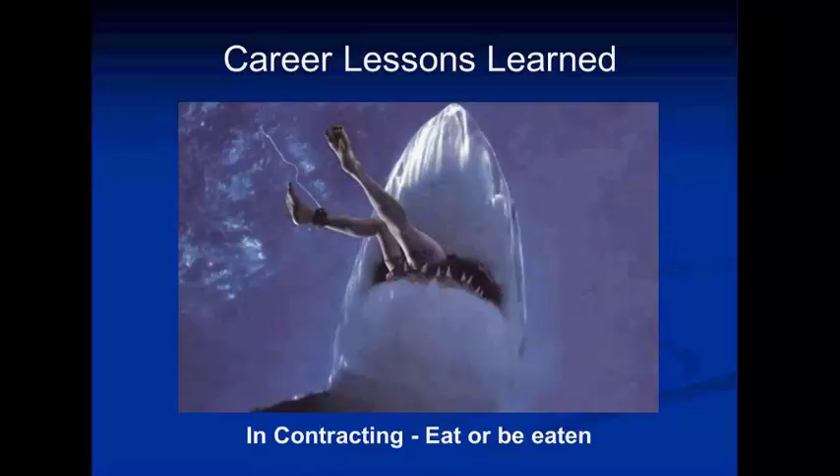So with that, I will turn it back to Erin and see if you have any questions.